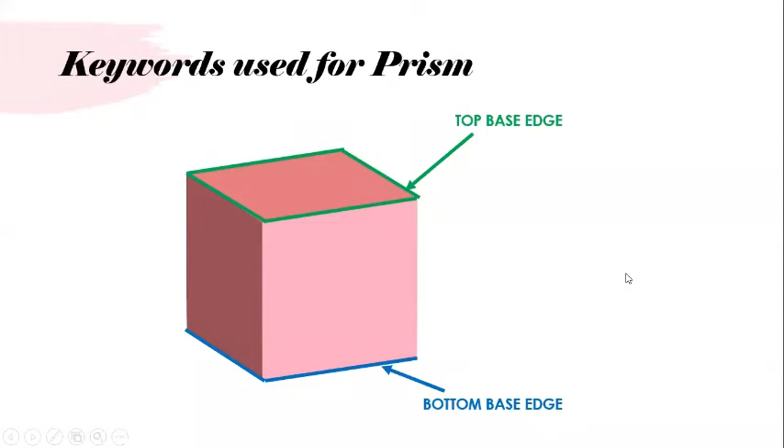So for a prism, the top and bottom are called base edges. Then whichever is on the sides of the prism, we call that a face. Sometimes they call it the lateral face, and since it is in a rectangle shape, they also call it the rectangular face. So these three keywords may be used in any manner. The next one is bottom base and top base.

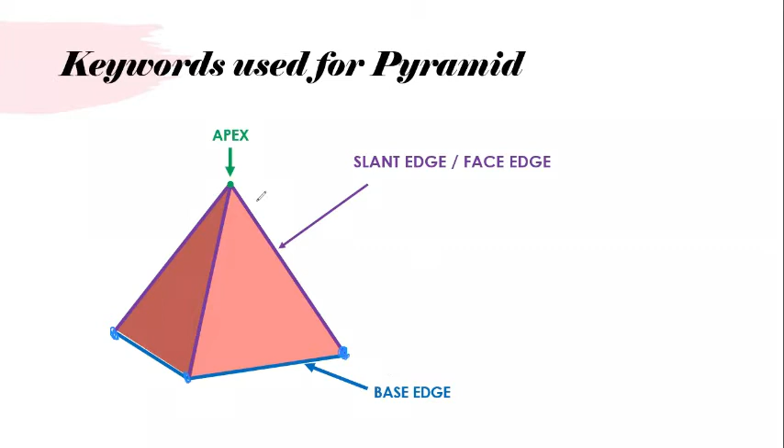Similarly, if you look at the face here, we call it the slant face, since it is slanted. And of course the face is a triangle shape, so they also call it the triangular face. These are some keywords that can be used for a pyramid.

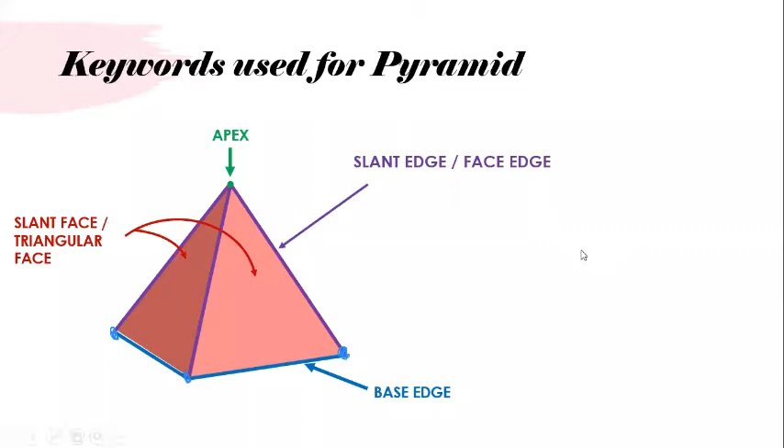Right, let's proceed. So next, of course this at the bottom is the base. Now for the steps: when a problem is given, first we have to identify what type of solid is being asked in the question. So either it's a prism or a pyramid. A prism has two bases, a pyramid has only one base.

The other one is a point, which connects in the pyramid. So first you have to identify what type of solid it is. Second, how many sides does it have? It may be 3, 4, 5 or 6.

3 sides means we call it a triangular prism or triangular pyramid. 4 means square prism or square pyramid. 5 means pentagonal prism or pentagonal pyramid. 6 means hexagonal prism or hexagonal pyramid. So you have to identify the number of sides for a particular polygon. That is your second step.

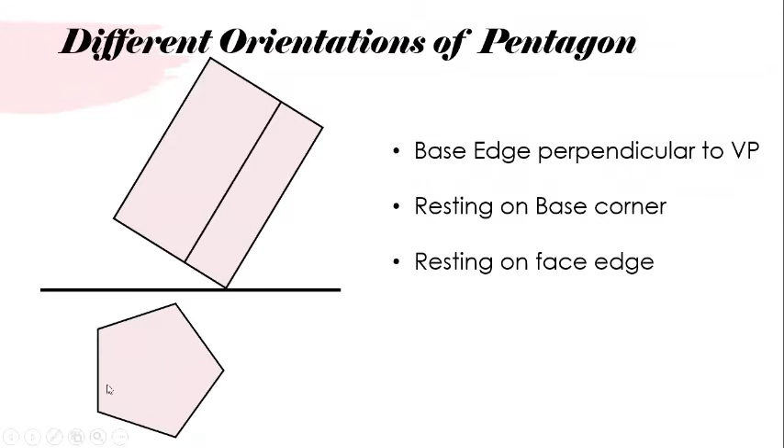The next one is base edge perpendicular to VP, same, resting on base edge, resting on one of its rectangular face. So previously we saw base corner, now base edge. So base edge means at this place, make sure the right hand side should have the edge. Previously it was on the left hand side, you can see.

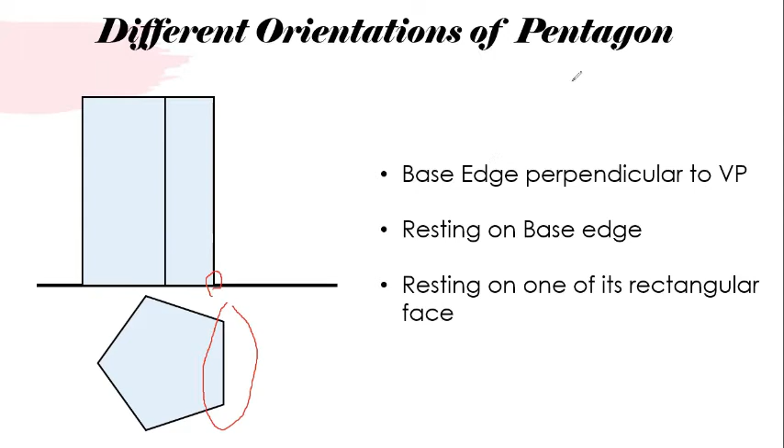So previously it is on the left hand side, so on the right hand side there was only one point. So now you can see that - right hand side you have 2 points edge, and left hand side it is like this. So again it is also the same as what we discussed. If you look at this, this is my edge. That edge is at this place, right? So when I make a tilt, you can see that it is resting on base edge, right?

Similarly, when this fully tilts, the face will be touching your XY line. So that is resting on one of its rectangular face. So near the face you can see the rectangular face. For a prism we call it a rectangular face, for a pyramid we call it a triangular face. But anyway, face resting means it has to be like that.

So let me consider this: draw a projection of a pentagonal prism of 25 mm side and axis 50 mm, resting on HP on one of its corners in such a way that the two base edges passing through it make an equal incline with HP. Draw its projection when the solid axis is inclined at 30 degrees to the ground and parallel to VP. So for the problem, whatever we discussed, we will go one by one.

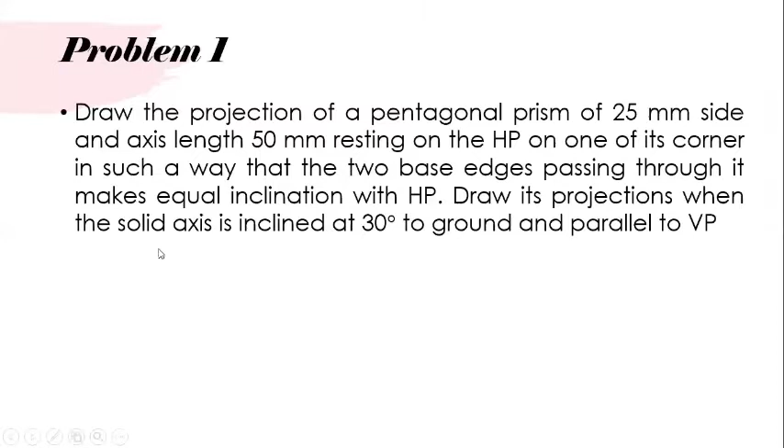First one, the type of solid. If you look at this, what is given here - they have said it's a prism. So we are going to consider, of course the problem is a prism type problem. Second, edges - how many sides do you have for this problem? If you look at it, it is called pentagonal, which means it should have 5 sides. So we are discussing a problem related to pentagonal prism.

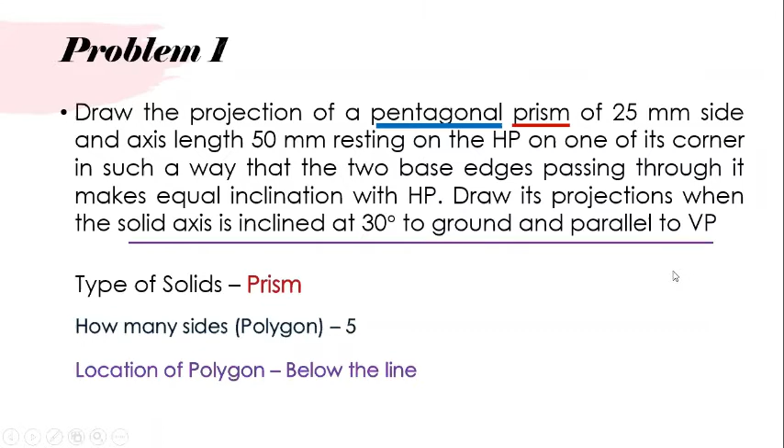Next, location of the polygon - should it be drawn above the line or below the line? For that, look at this statement: the axis is inclined at 30 degrees to the ground. Ground means HP - sometimes they call ground as HP. So ground is HP and parallel to VP. So as per the statement, whatever we are going to draw should be below the XY line, and the pentagon should be below the XY line. The next one is orientation - orientation is given like this.

Resting on HP on one of its corners - this is the statement given. Let me explain what it means. First, one of the corners means it has to be positioned like this, so a corner rests at this location. And of course, the two base edges are inclined, equally inclined to HP. So when I draw something like this, it is equally inclined - that is what they mean. Of course, with a lighter tilt it is still resting on the corner, but specifically to give it correctly, they mean it has an equal inclination with HP on both sides.

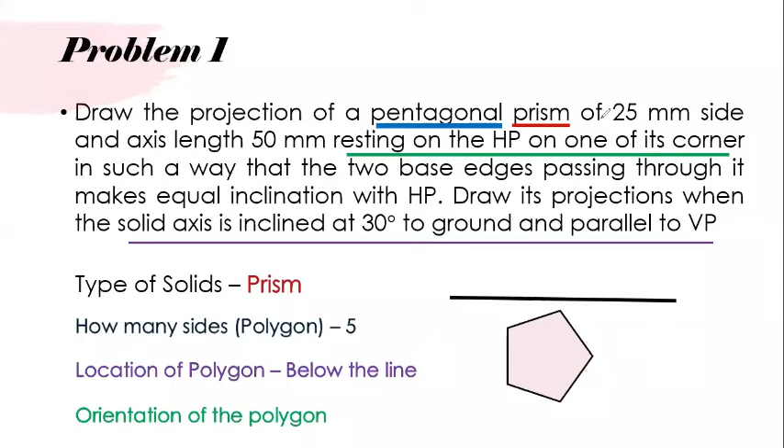Now I will go to the AutoCAD software and try to draw the same problem. This problem is in your tutorial book, page number 134, problem number 12. So this is the software.

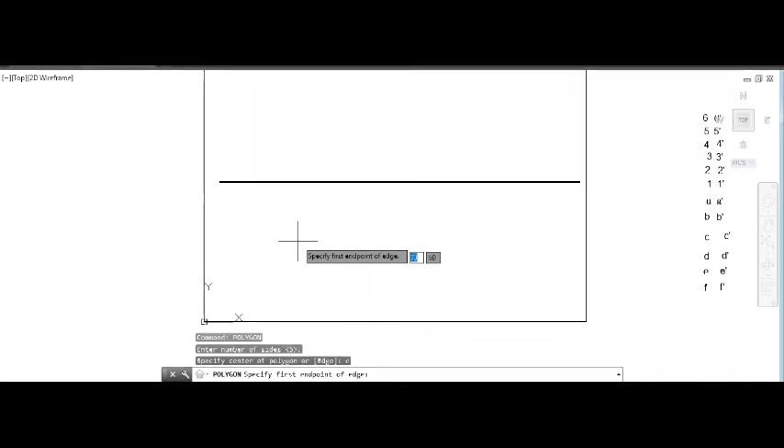Draw an XY line first. I am going to draw my pentagon here, below the line since it has to be below the line - let me go for it. First I'll draw the pentagon, with side 5. My pentagon should look like this, with each side 25. I will mention it, of course, and this has to be a solid one. So this is my pentagon.

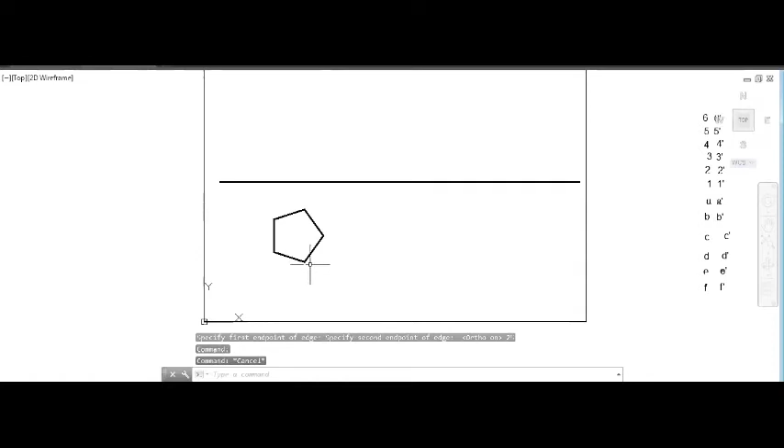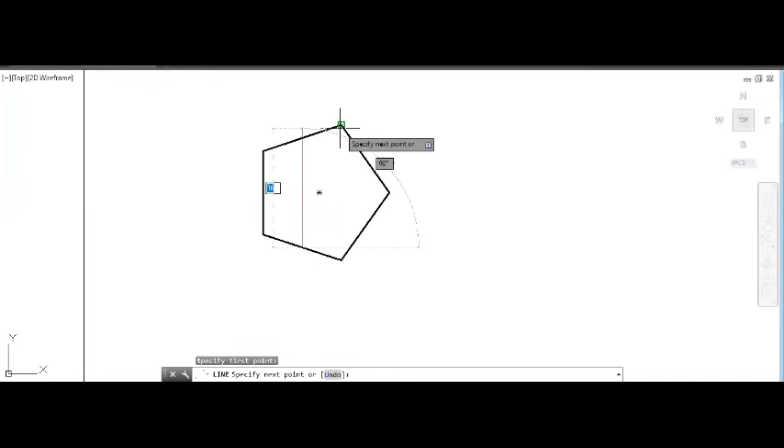Next I have to project it, but before projecting, I have to identify the center point of the pentagon. To do that, I take the midpoint of one line and connect it with the opposite corner. Similarly, identify another midpoint of a line and connect it with the opposite corner. When these connect, the intersection point is the center point, which I have to project.

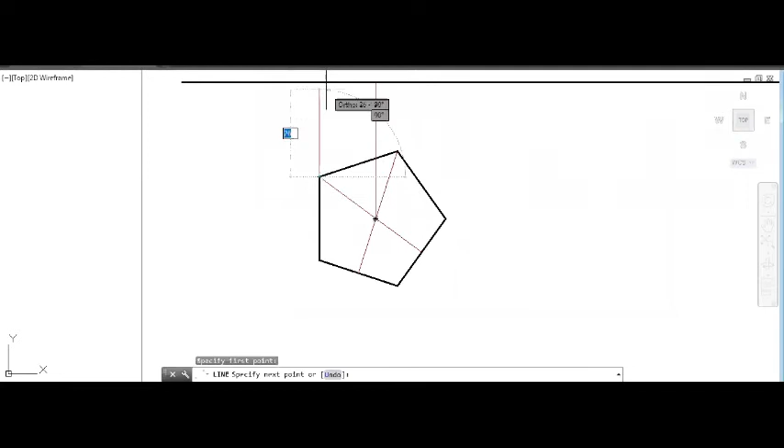Similarly, here also you have the projection, of course at the edge, and similarly this edge. So I have drawn here. All this, of course, the color I show is for 2H pencil, so it should be drawn lightly. Wherever it is dark, I have mentioned it accordingly.

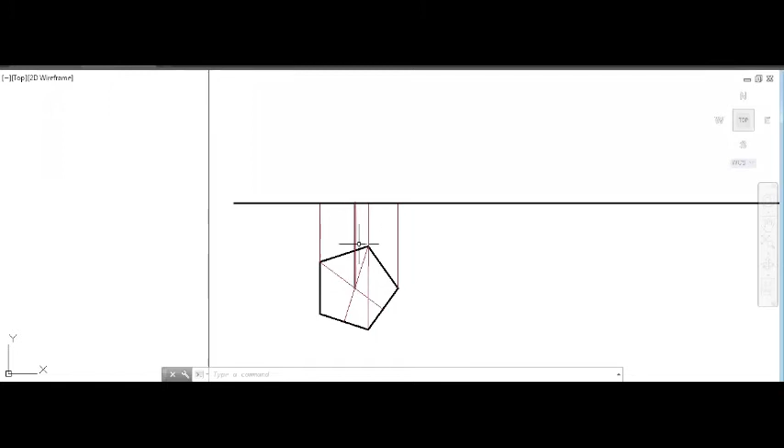For the axis, our axis is 50 mm. So what I can do - since all this is parallel, I have no problem; for a prism I can draw it directly. Whereas for a pyramid, we first draw the axis and then connect it. Since this is a prism, no need to worry about it - you can use any of the edges. I will go for this edge; from here it has to be 50.

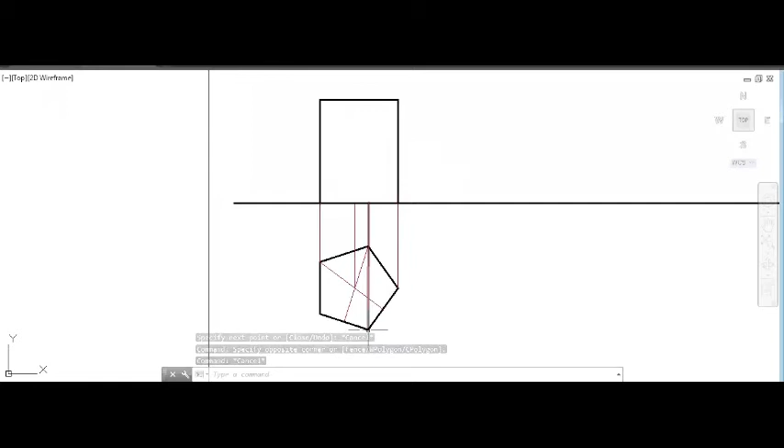All of this, whatever it is, this is a solid line. If you see this point, it is hidden, but this is visible - we are going to concentrate on the visible parts. So this will also be visible. And of course, this is the center point axis, so the axis should be like this. This has to be solid, right?

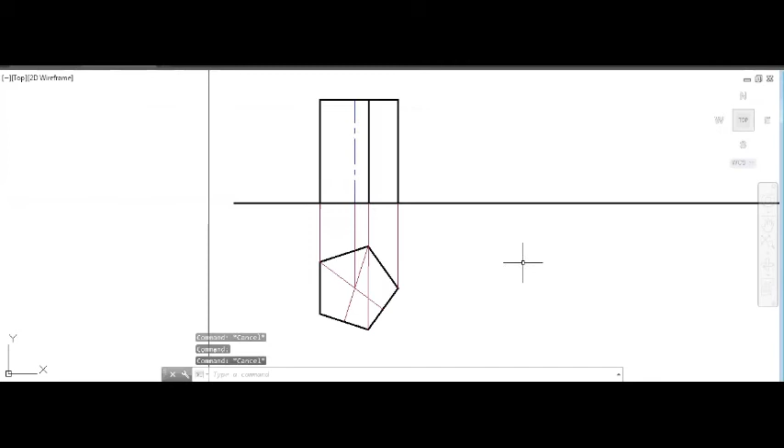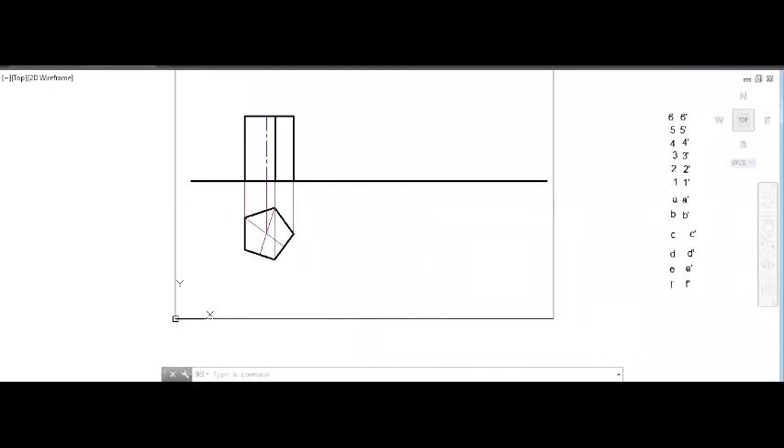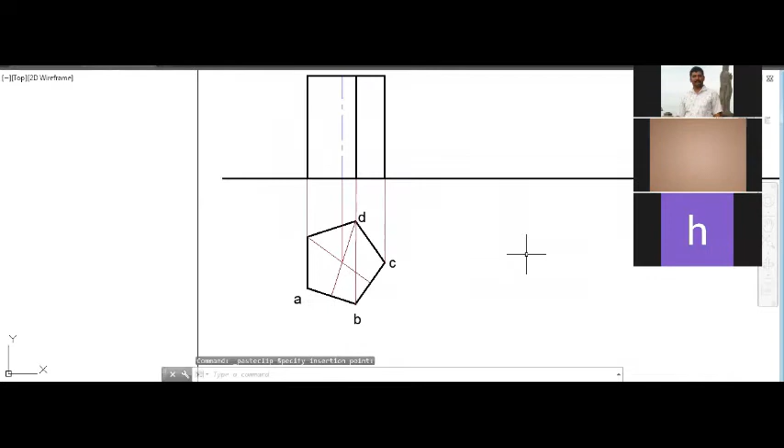Now let's do the naming. I will call the top base as A B C D E, and the bottom base as 1 2 3 4 5, so it is easy for understanding. So let me consider accordingly. Now since the top is visible, the top base will be in terms of A B C D E - so this is A, B, C, D, and E. This is the top base, which is visible.

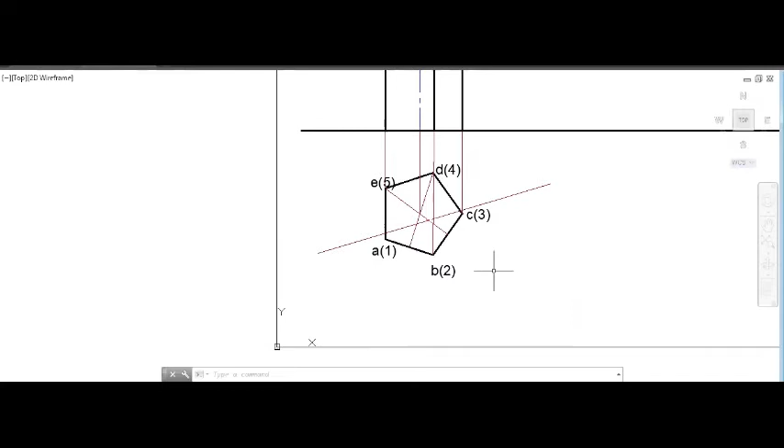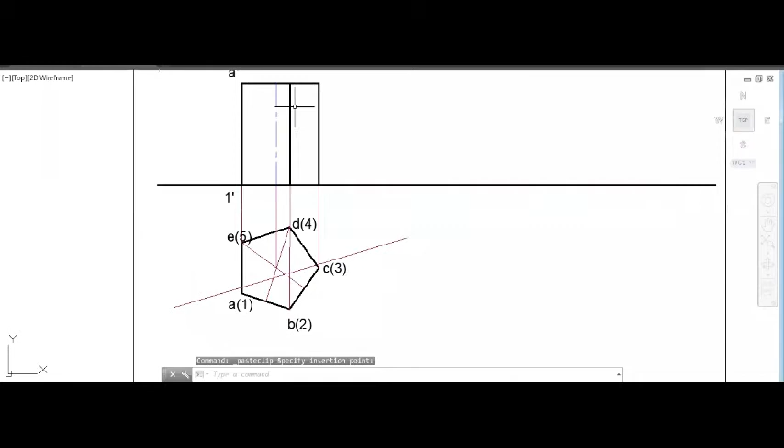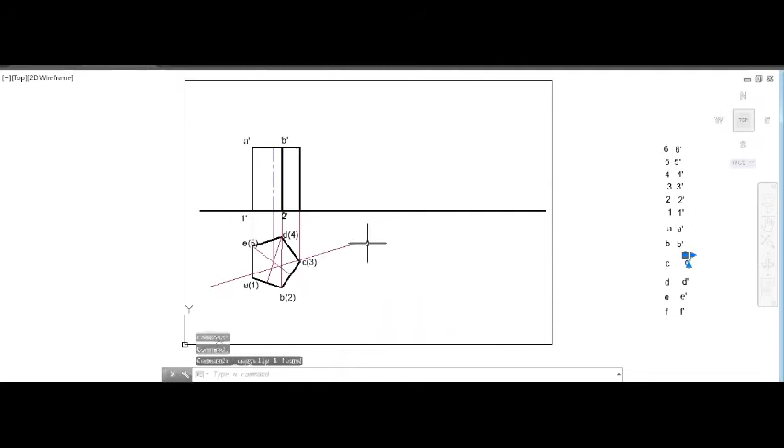So first, if you look at this, A1 will be visible. So it is A dash 1 dash. So A will be here and 1 will be here. Similarly, in this place, B and 2 is visible. So B dash and 2 dash. Similarly, C3 is visible, so C dash and 3 dash.

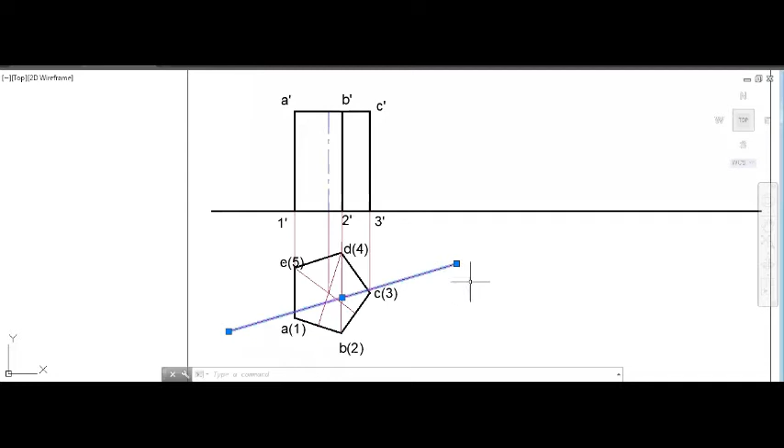So if you look at this, other edges, I will delete this, just drawn for reference. So other edges, E5 D4, all these are hidden, so that has to be in the bracket. Just for information I have drawn this line. Now I will delete this. So now I will double click and change this. I will put a bracket.

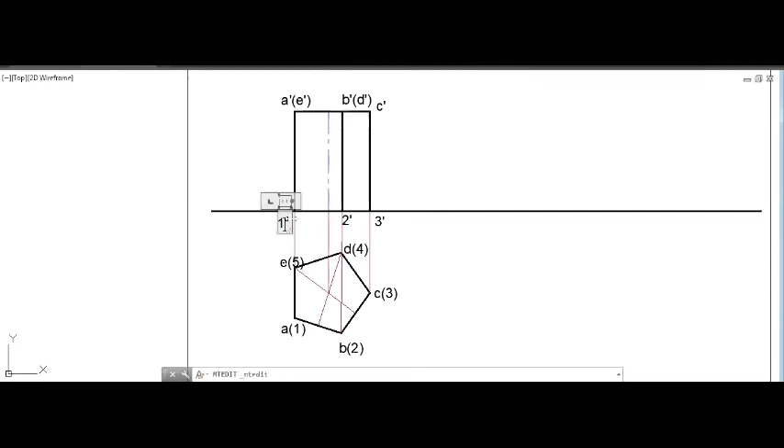Since on top I called it ABCD initially, I can easily understand. So this will be E dash. Similarly this will be D dash. So below this will be 5 dash, and this will be 4 dash. So now I have named everything.

So this is how my prism will be. So the next step is my inclination. It is said that my prism is inclined at 30 degree to the ground, that is in HP it is inclined at 30 degree, which means there should be an inclination. Axis is inclined at 30 degrees.

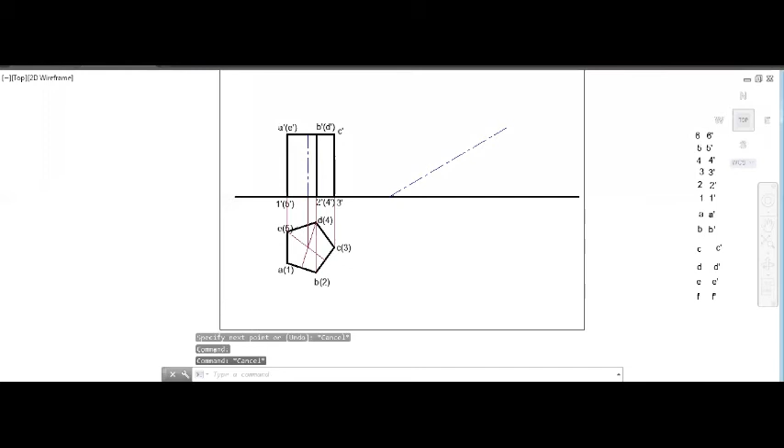So let me draw a line. So if you look at this, at 30 degree you should make sure that your axis is inclined. So this is my axis actually. So my axis is inclined at 30 degrees. Just for reference, I am showing the dimension here. Of course, you can able to see 30 degrees, right?

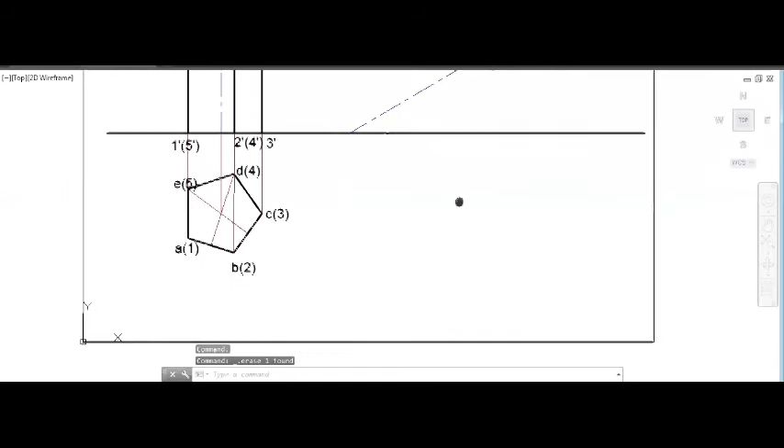So whatever we have drawn here, this should be tilted to this axis. So the axis should be parallel to this. And make sure that it is mentioned that one of the base corners is resting, and at that point it should touch the XY line. So you have to draw your thing accordingly. That can be done by measuring from this axis.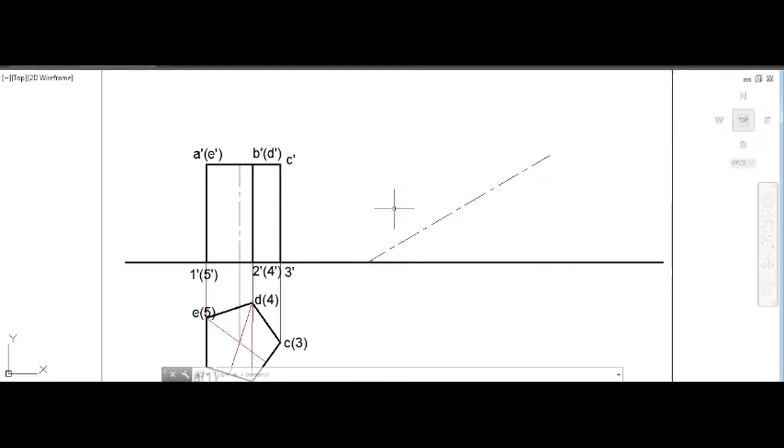So keeping it perpendicular here, wherever it would be, accordingly you have to draw it. Of course without a draft it's difficult, but try it out. So accordingly you have to draw. For me, in this software it's easy, so I can do it. So now let me tilt it.

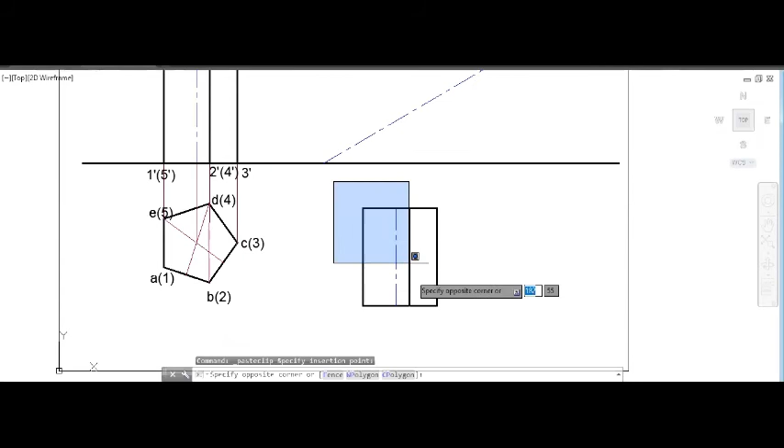Just for reference, I am doing it below. So I will just make it. So I have to make a rotation, that's it. So now you can able to see.

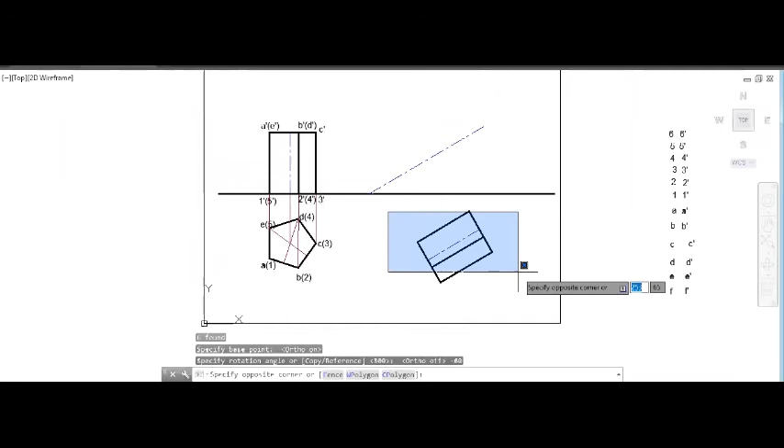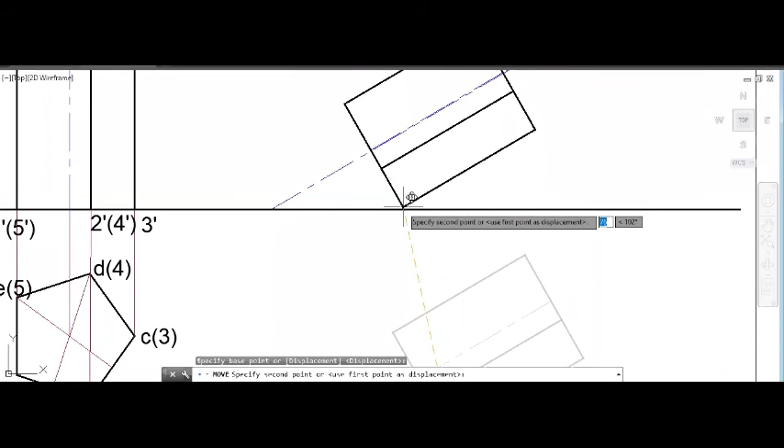So it has to be like this. So in the corner it has to be like this, right? So in the axis, now merge the diagram, I will bring it. So you can able to see here, right? So it is like this, right? Of course parallel, it doesn't matter. It means that both are same, right? Okay, so now you have that inclination, right?

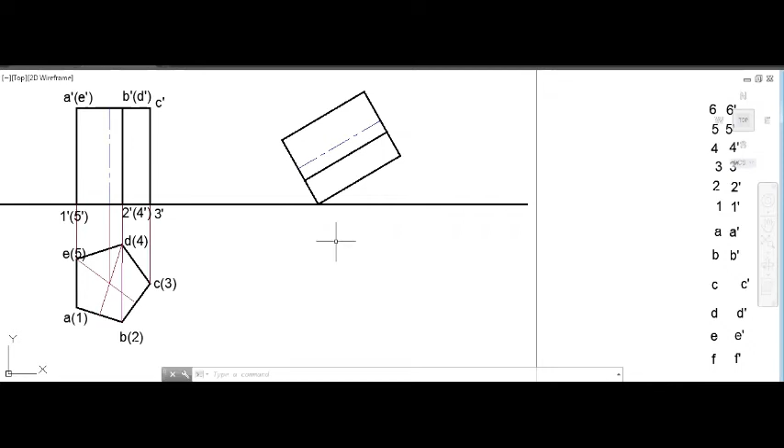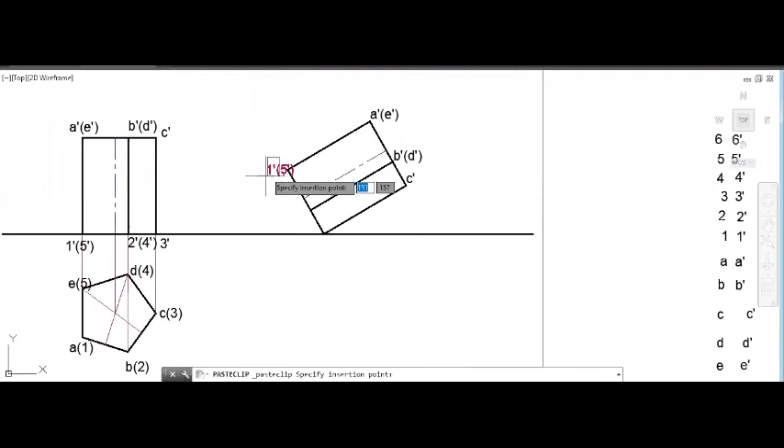So if you look at this, it is inclined at 30 degree. So of course the naming here also is important. So because of the tilt, this name, this will be here, of course this will be here, and this will be here, right? Similarly 1, 5, so this will be here. So 2, 4 will be here, and 3 will be here.

So now what has to be done is you have to draw some projection lines. Whatever projection line meets together, whatever it meets with, that will be considered accordingly. So let me consider, let me draw a projection line. I am drawing a line from 1 and 5. So here, where is 1? So 1 is here, so I have drawn vertically. Here I have to draw horizontally. So horizontally, 1 is here and 5 is here. So I have to draw 2 lines.

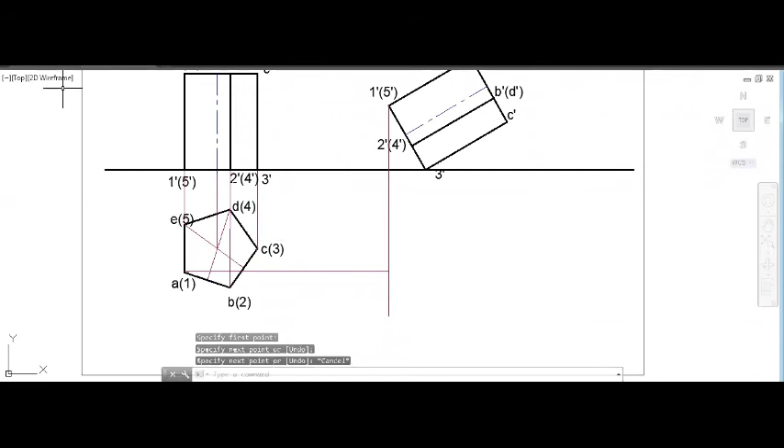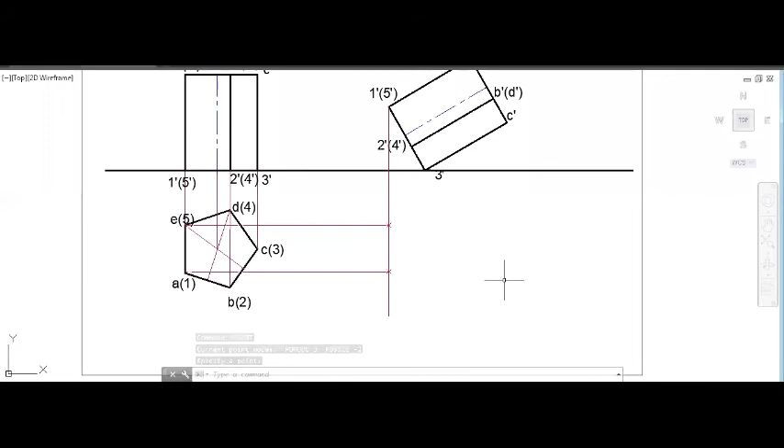One is from here, the other one is 5, so 5 is from here. Right, so these are 2 points. So I will mention the point. So we have 1 point here and 1 point here. So what are the names of this point? So I have marked 2 points, that is 1 and 5. So this is point 1 and this is point 5.

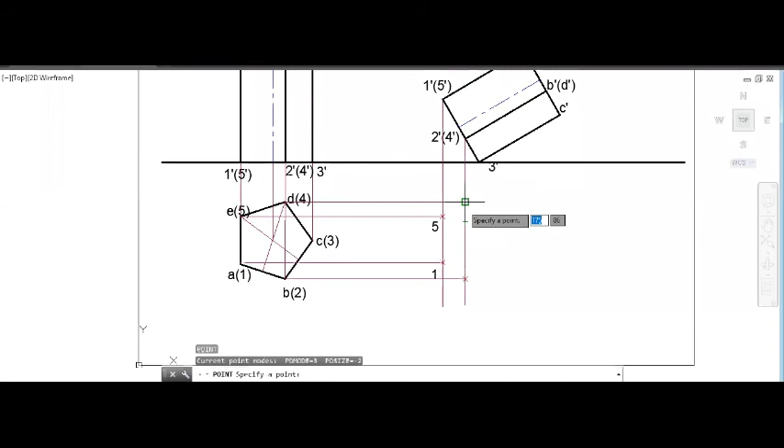Similarly, let me proceed. So another line I am projecting here. It is 2 and 4. So I have to project 2 and 4. So this is 4 and this one is 2. So I have 2 points here. So this is 1 point and this is another point. So this is 4 and this one is 2.

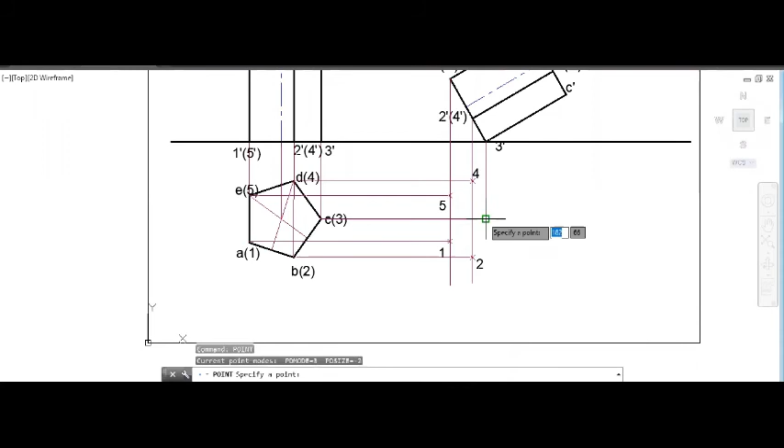Let me name this. So this is 4 and this is 2, right? So next 3. I will project 3. Similarly, 3 here is this location and draw. So this one is 3. So I have a point here, right? So this is 3.

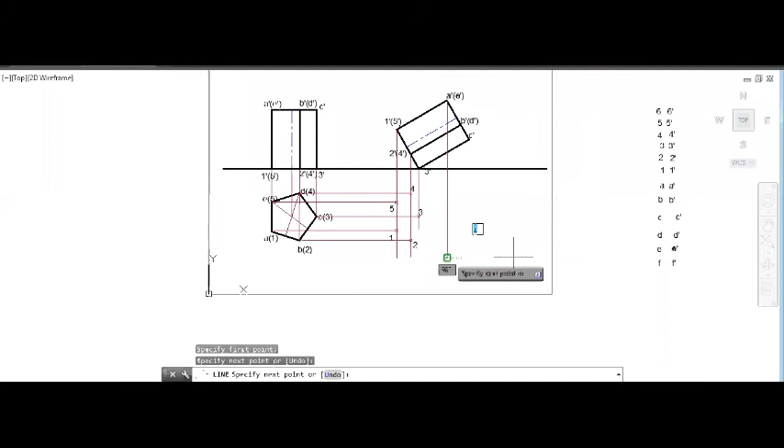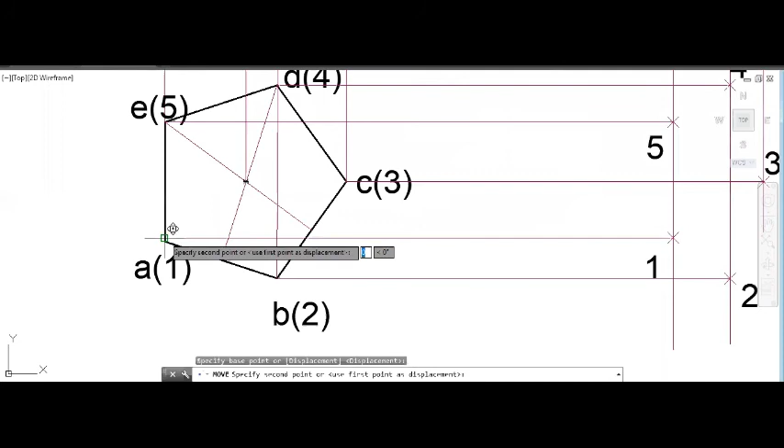So I have marked 1, 2, 3, 4, 5. Similarly, I am going to mark this also. For easy reference, let me project it. So this is A and E. Where is A? So my A is here. I made a mistake. From A, so this is my A, right? Other one is E. So E is here. So these are 2 points. So this is A and this is E.

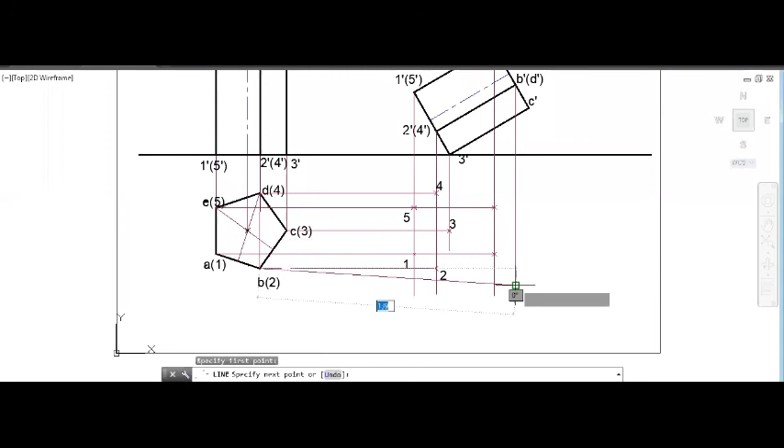Similarly, B and D. So B is here and D is from here. So these are 2 points. Last, C, projecting C. I see it is from here. So this is my next one.

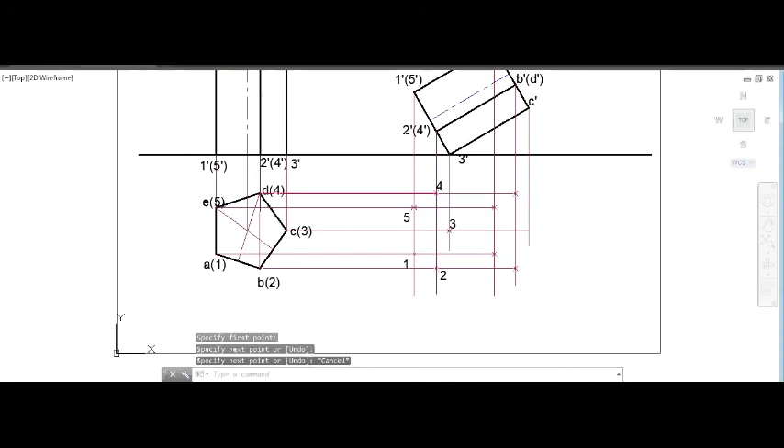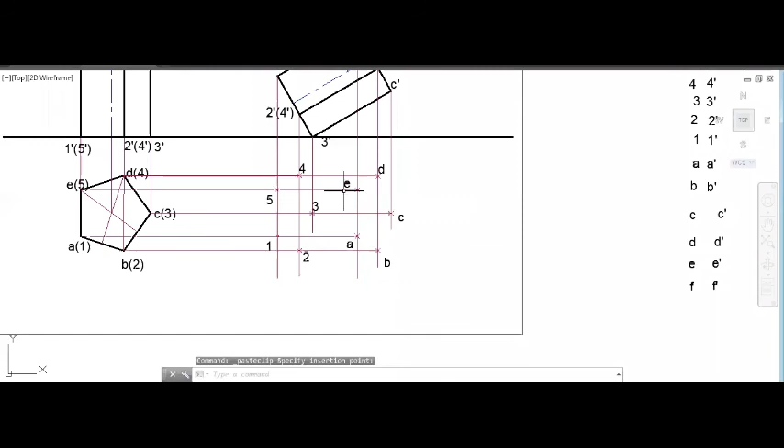So for naming, of course, so this is A, this is B, this is C, D, and E. So now I have completed all my points.

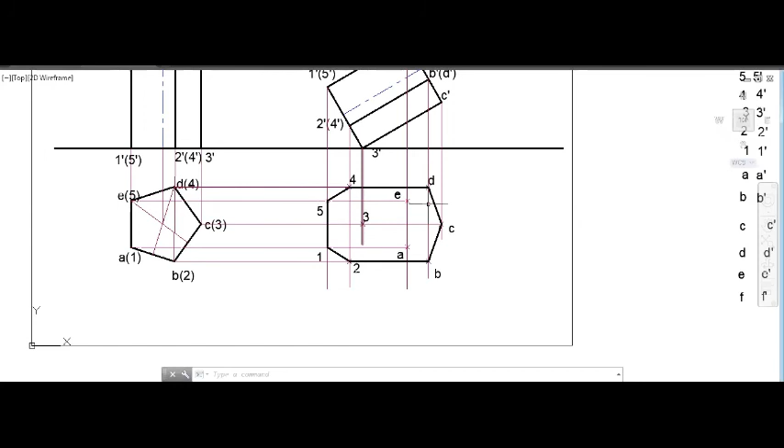In my front view, I have to identify my extreme points. On the left, the extreme point is 1, 5. This is the extreme left. Extreme right is C. So this is extreme, so let me consider it.

So let me draw a line something like this.

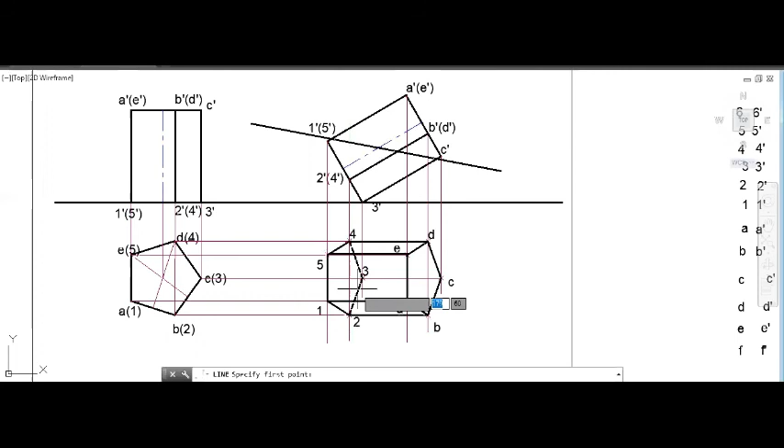So now let me take this. So this is my answer. My answer should be like this. So when I tilt it and after mentioning it, we get this as the answer. So that's it.